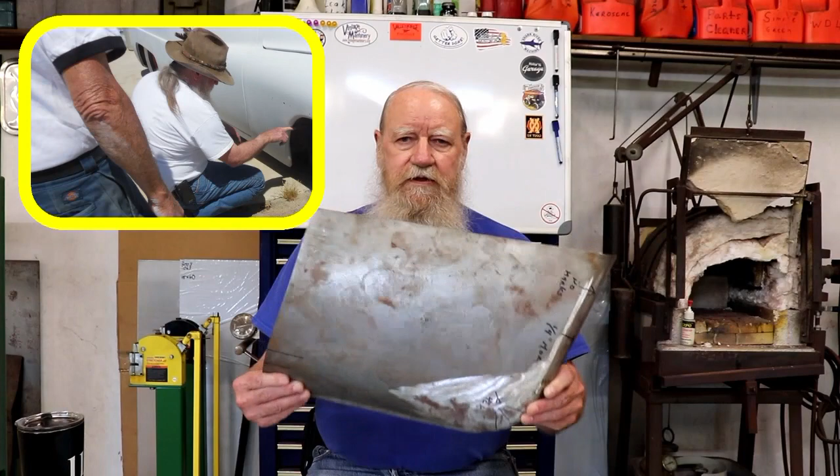I went to visit Gene Winfield at his shop in Mojave, California, and one of the projects we did during that stay was make one of these hatch panels for a '50 Mercury two-door sedan. While we were making that panel, I was allowed to turn the handle on the old machine he had that created this radius on the leading edge of the panel.

When we got finished turning that piece, I asked him why he wasn't using the machine that I had made for him to do that job, since it being electric, he wouldn't have to wait around to grab somebody else from his shop to turn the handle. Well, the answer was he didn't have a set of dies that would fit my machine, the machine that I made for him.

So that is the purpose for this video. Since I have a radius turning tool, I said I'd be more than happy to build a set of dies that would fit my machine.

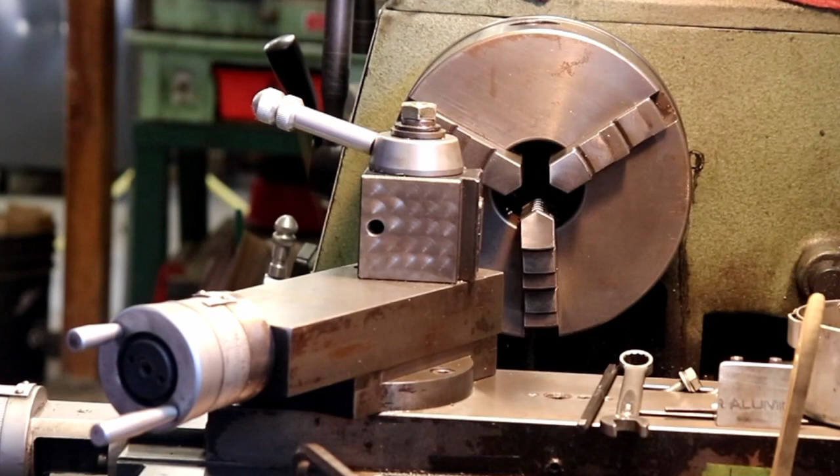It's 100 degrees in the shop right now, so if anything goes awry, I've got a built-in excuse. Let's get started. My radius tool is usually just hanging up on the pegboard here alongside my knurling tool, and I keep the 2 bolts that bolt the radius tool down to the carriage, along with the wrench, right on a shelf just in front of the lathe.

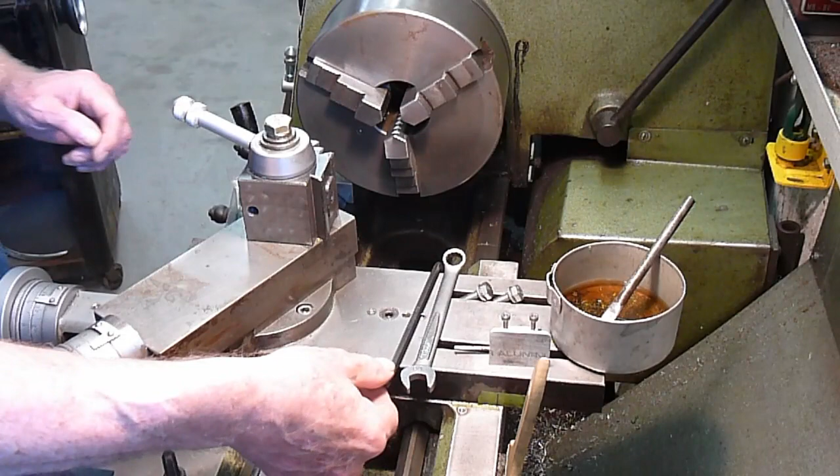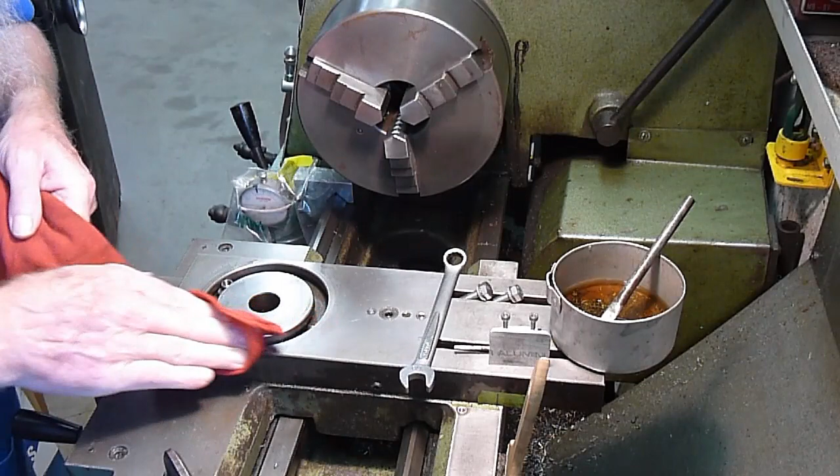So the first thing we're going to do is take the compound off. I'm going to wipe this whole surface off up here, make sure there's nothing underneath that will be embedded into the carriage when we tighten this down.

I'm going to place the T-nuts at 6 and 12 o'clock, and then position the radius tool, get the bolts started, and make sure that the handle is clear.

Next, I'm going to install the mandrel, get it up fairly short. Next, we put on the blank. Get that keyway up, slide that on, and tighten that down good and snug.

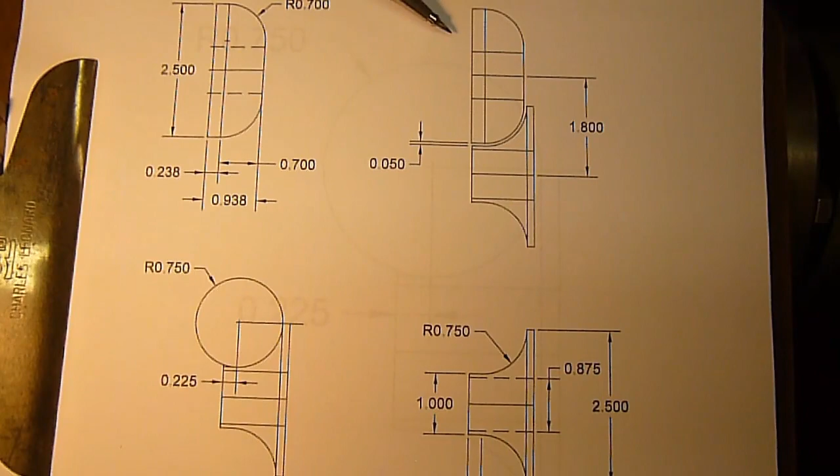You can see here that I misspoke earlier. I remembered this on center being 190, but it in fact, from the center of the concave die to the convex die, center line is 180, or 1 inch 800 thousandths. That still keeps the shafts pretty much in line.

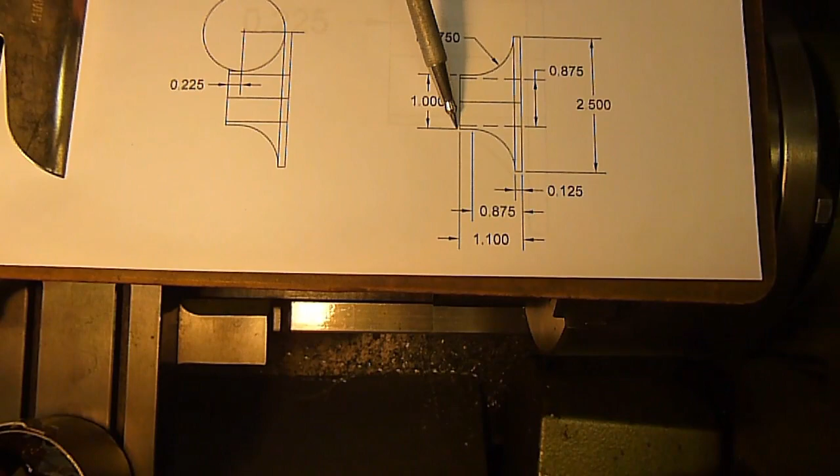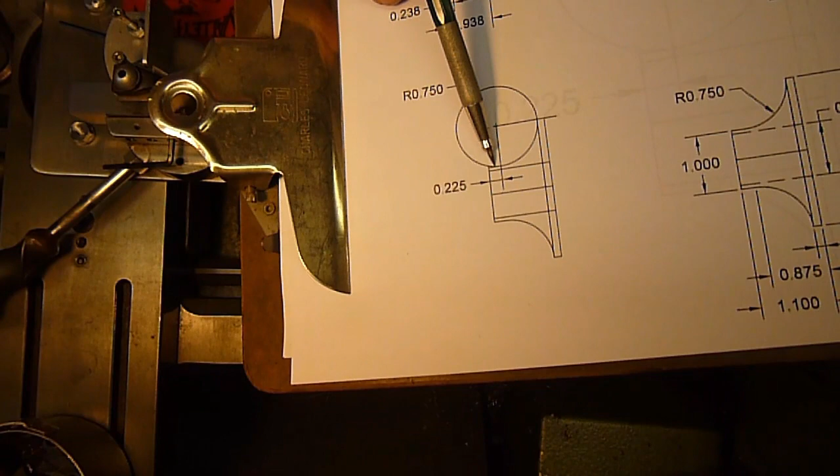And these are the dimensions we'll be going after. We have 1/8 of an inch that we have to stay back from the back edge, and that'll allow, with the 3/4 inch radius, the snout of the die to be 1 inch in diameter. Here you can see that from the center to the tangent point, we are at 0.225. But if you draw the tangent line, there's this little segment left over. The radius will be coming up off camera, and after I get this finished, I'll start at this point and turn this off flat, so we'll have a slight flat in this area.

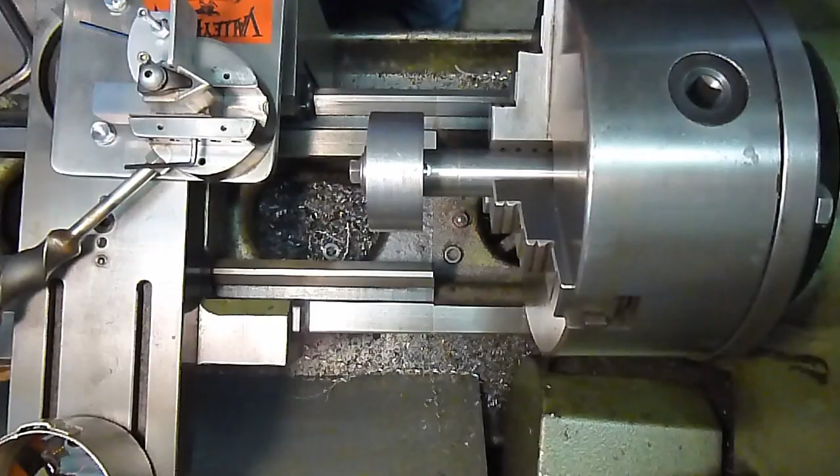So what we're after is a 3/4 inch radius in here, so we're going to come out to 750 thousandths, and tighten that up.

I'm going to set my square here at 750 thousandths. Put the square up against that little aluminum block, bring this forward until it just touches, lock that down, and I'm now at exactly 750 thousandths radius.

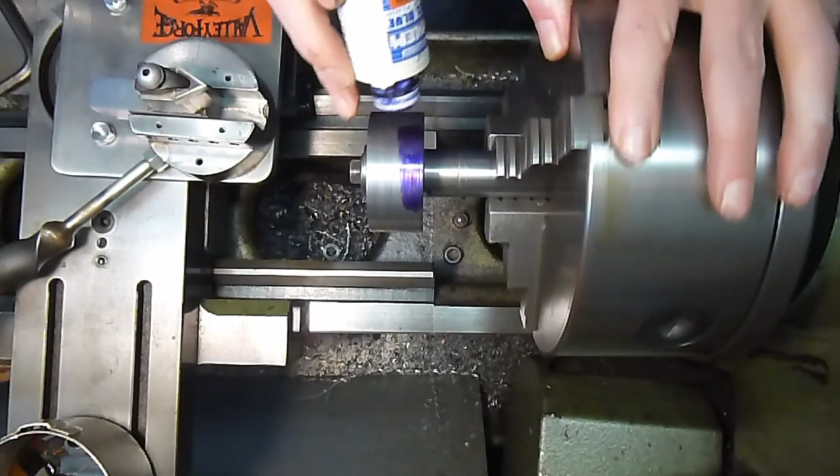I'll tighten all 3 of the set screws down. So if you remember, I want a 1/8 of an inch left on the back side where the radius will terminate.

So I'm going to put some Dykem on here. I'll set my calipers to 125 thousandths.

So as I'm making this radius in here, when I see the tool at that line, I know I'm finished. Now this will be a tool setup that you'll probably not see either Tom Lipton from Oxtool or Joe Pieczynski attempt.

I have just a computer magnet, very clean and flat, and a piece of 125 thousandths material. I'm just going to snap that on there, bring my tool in until it just touches, and lock my carriage down.

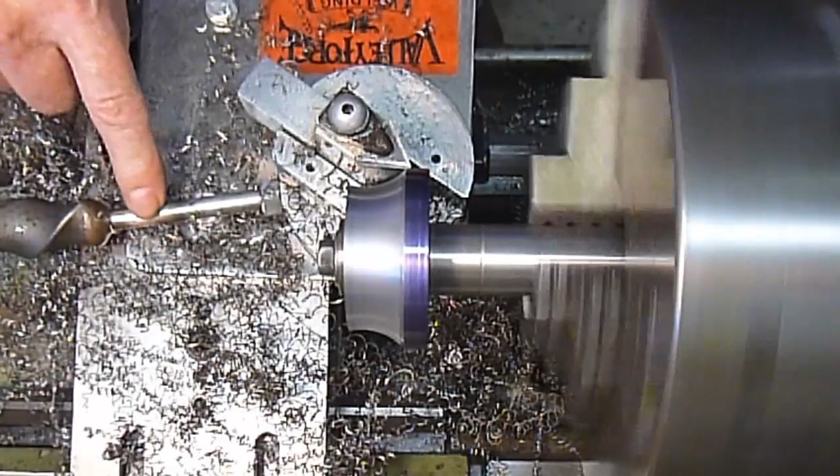Taking about a 10 thousandths cut with each pass. And you can see, by having such a long handle, each pass you can see all of the grooves in there and how consistent they are. The handle is nothing more than a 3/8 bolt and a piece of 1/8 by 1 by 1 angle iron.

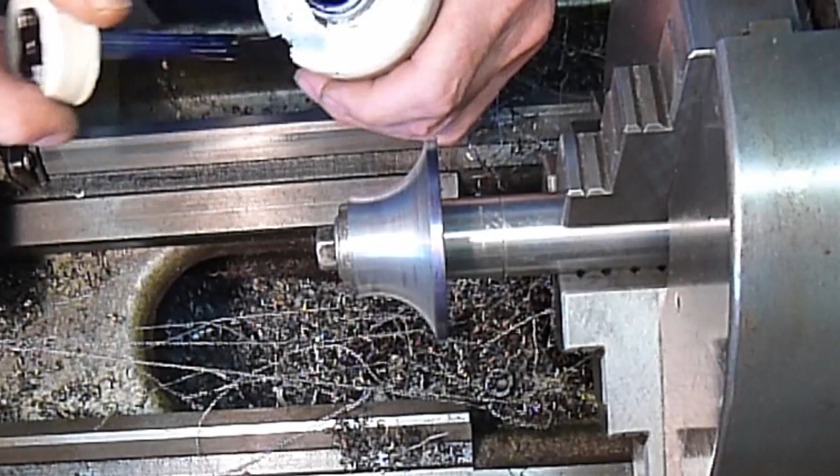Let me get some Dykem on here, and we'll hit it with a flexible file and see just how smooth this is.

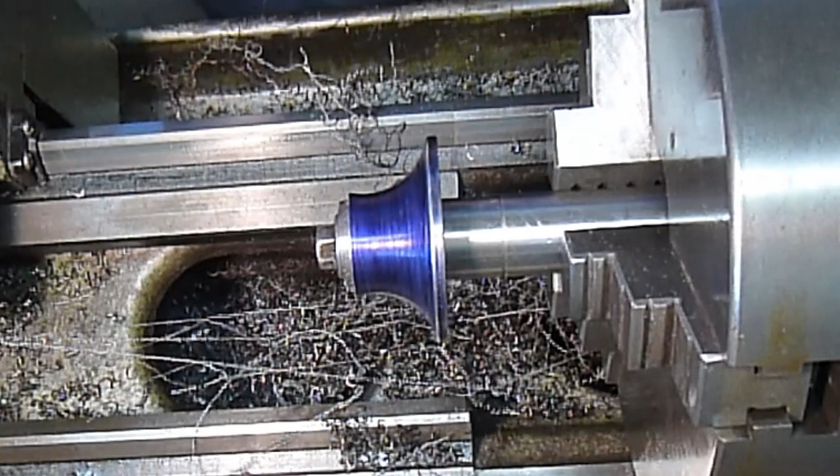Okay, so I did just a little bit of deburring with a file on these sharp corners so I wouldn't cut myself, as I have my finger in there. And here is what's called flexible file. You can get this in the same area that you would buy your sandpaper. Ask the guy at the counter or out in the aisle for flexible file. He may know what it is. So let's see how smooth this is.

I would say that is very good. Just a little emery cloth, you can see how very fine the ridges are in there. It'll take nothing to get this thing just as smooth as a baby's butt. Let me get this off and I'll see you over at the table.